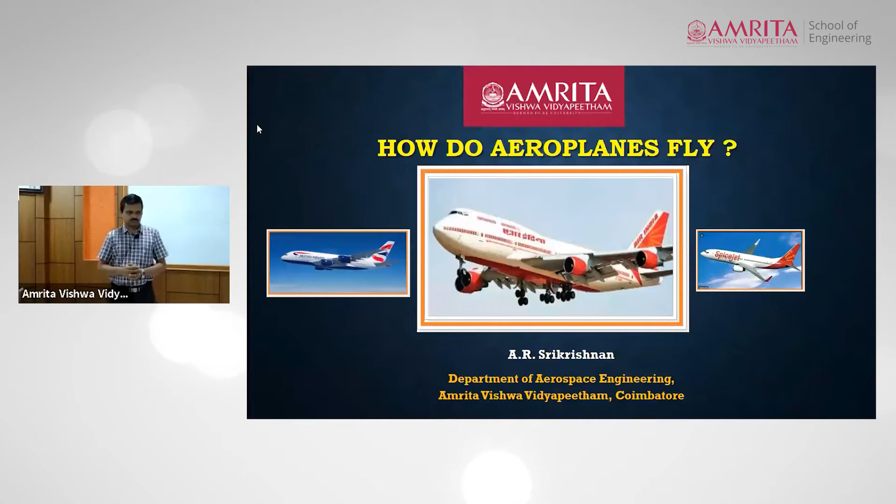Just to give you an overview of what we are going to discuss in the next maybe 20-25 minutes or so. We will first discuss what it takes to be able to fly. We know that we cannot fly. So we'll just address what it takes to be able to fly, and we will see briefly how aeroplanes manage to fly. So what does it require to fly and how do aeroplanes manage to fly?

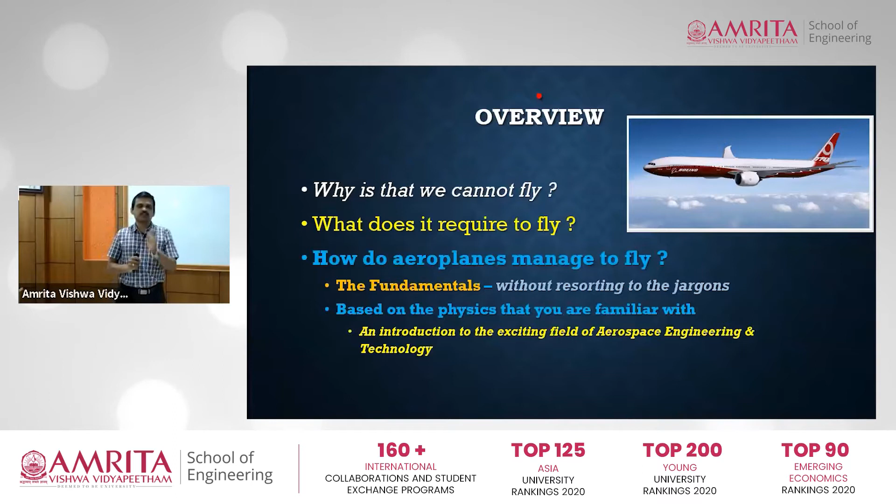We will just look at the fundamental aspects of how aeroplanes fly, without resorting to the jargon or theories which are used in this field, and we will try to rely only on the physics that you are familiar with, the laws of physics that you have studied, and the concepts that you already know. So that's the attempt in this particular session.

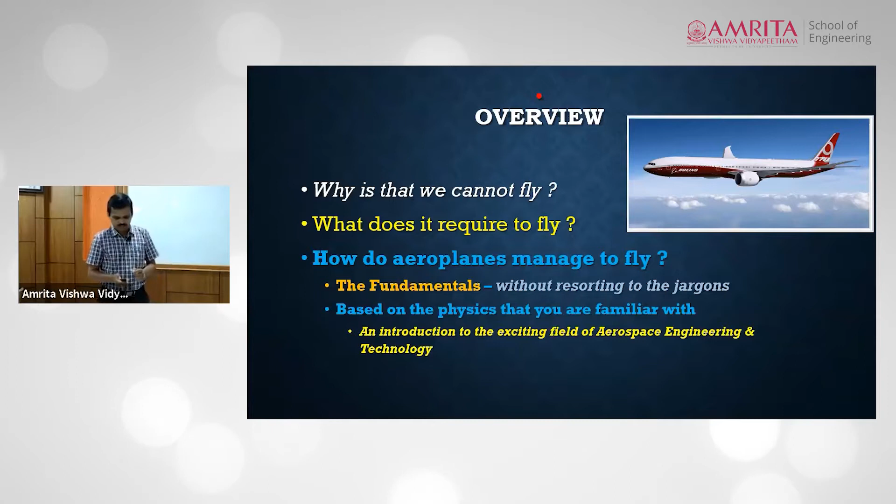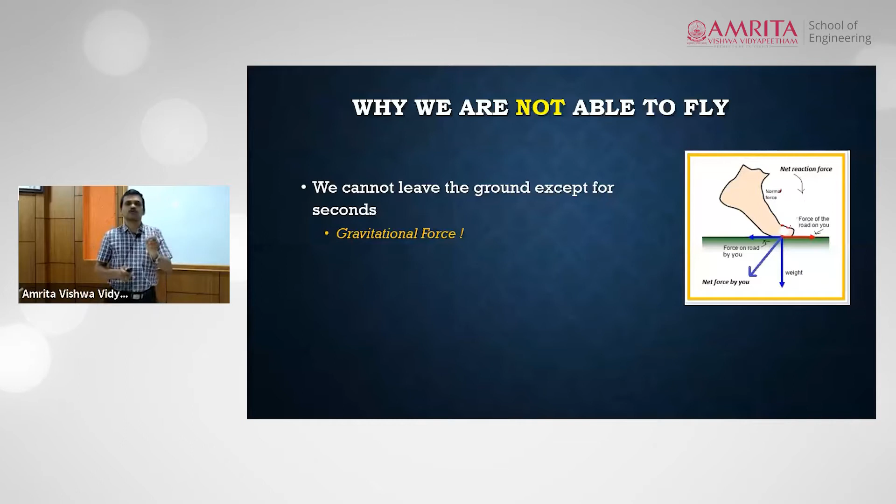Before we address the issue of how aeroplanes fly, let's pause for a while and think, why is it that we are not able to fly? We know that even if we want to fly, we are not able to. In fact, we cannot be in the air for more than a few seconds possibly. If you jump up, you will be pulled down, and we know why it happens, because the gravitational force always acts on us. So that's why we are not able to fly, but we know that we can walk.

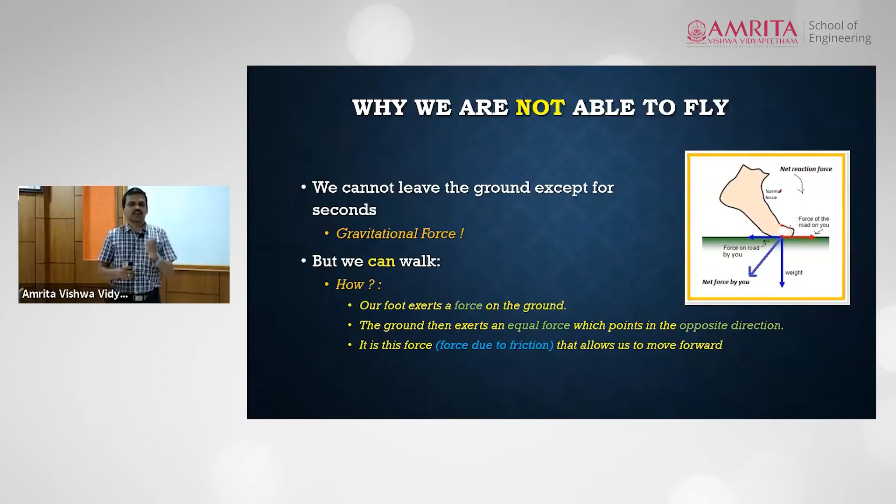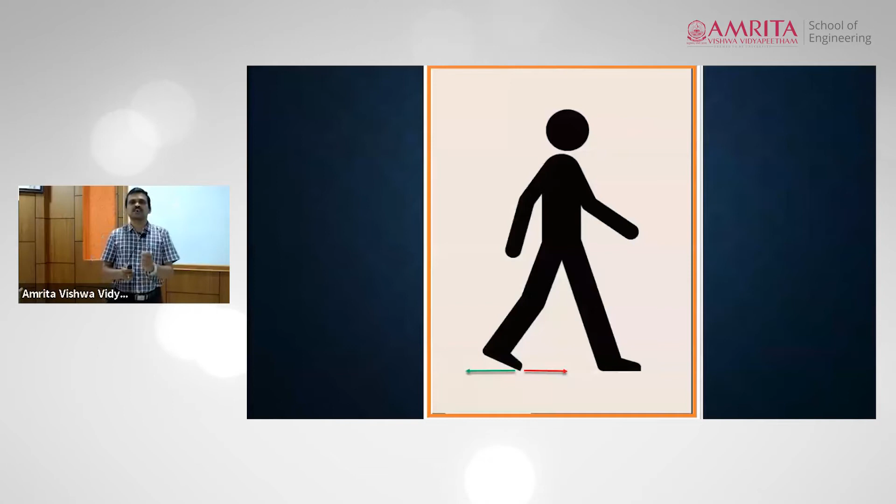How do we walk? We exert a force on the ground by our foot, and there is an opposite force created because of friction, which will be in the direction that we are trying to move. That force, created as a reaction because of friction, keeps us moving forward. So when we walk, there is a force that we apply on the ground, and there is a reaction created by friction which keeps us moving forward.

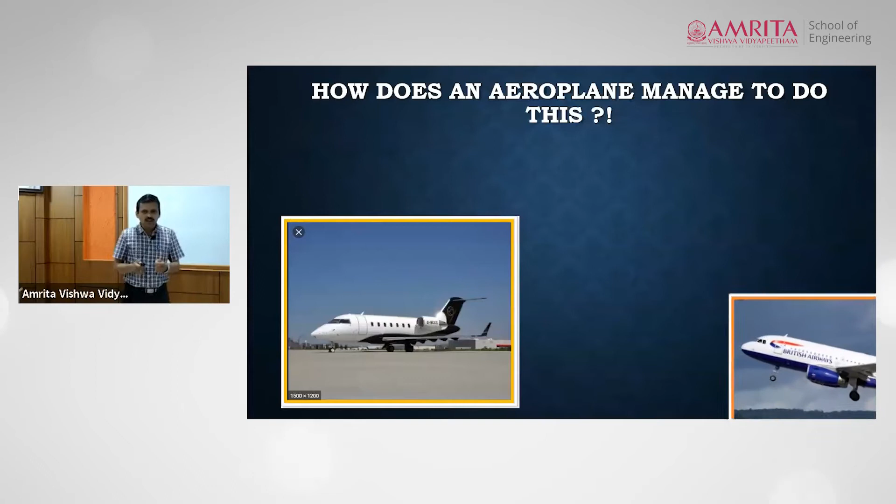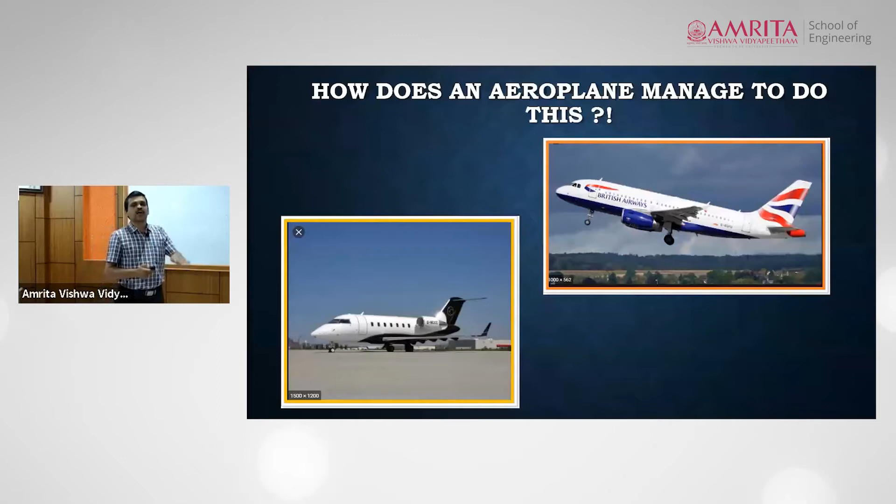When you consider an aeroplane, the image that you see there is an aeroplane which is parked in the airport. So it's grounded, it's standing on the ground. What we are trying to understand is what it takes for the aeroplane to go from being parked in the airport to being airborne, as it is in the next image. That is what it takes between these two stages: on ground versus in air.

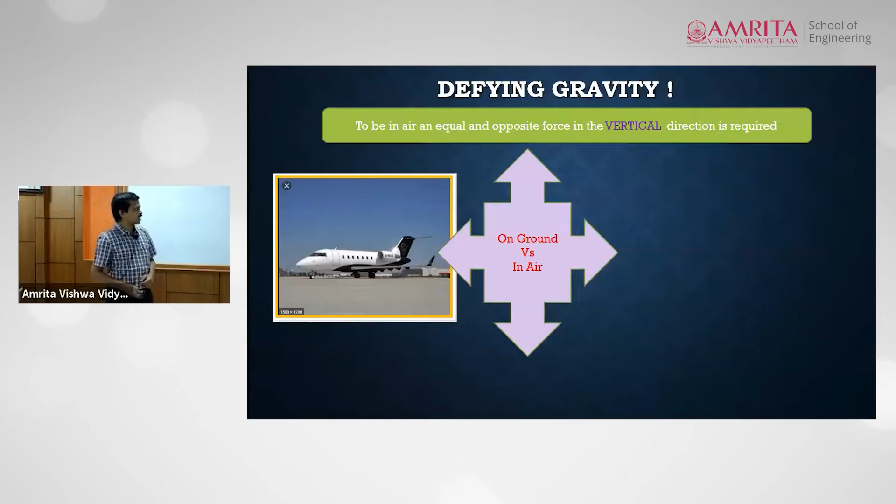When the aeroplane is parked in the airport, the force of gravity is acting on the aeroplane the same way as it is acting on us, as indicated by that red arrow, which keeps it down. Whereas when it is up in the air, please look at the second image, the force of gravity continues to act as indicated by the red arrow, but there is another force which is shown by that green arrow in the picture.

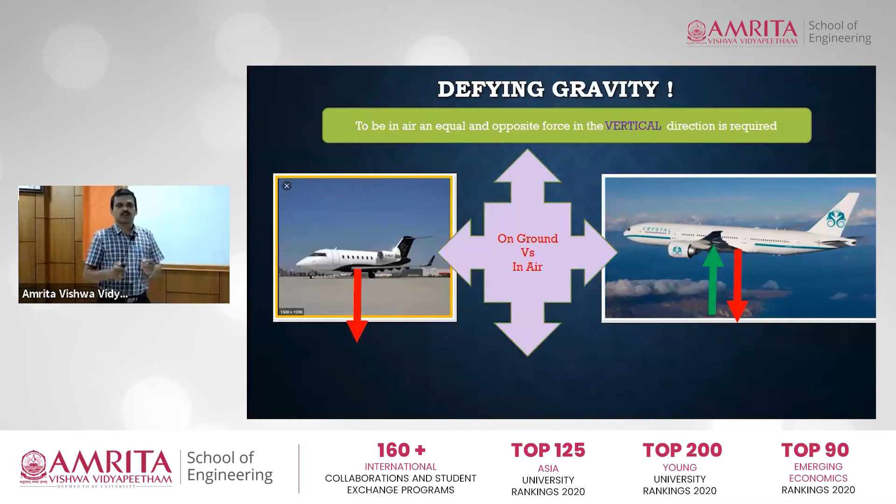There is another force which acts in a direction opposite to the force of gravity, and it's this second force which helps the aeroplane to be in the air. So what we are trying to understand is how this upward force is created. There is a force which lifts the aeroplane up. How is this force created? How does the aeroplane manage to get this force which lifts itself up into the air?

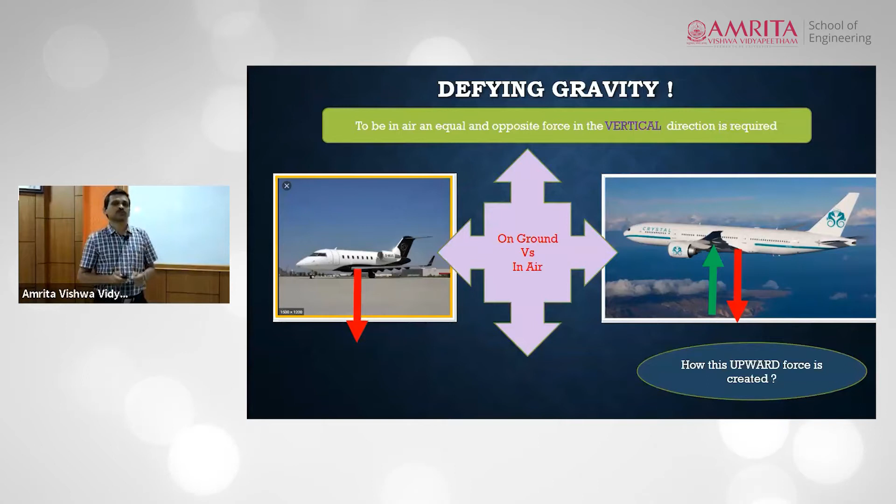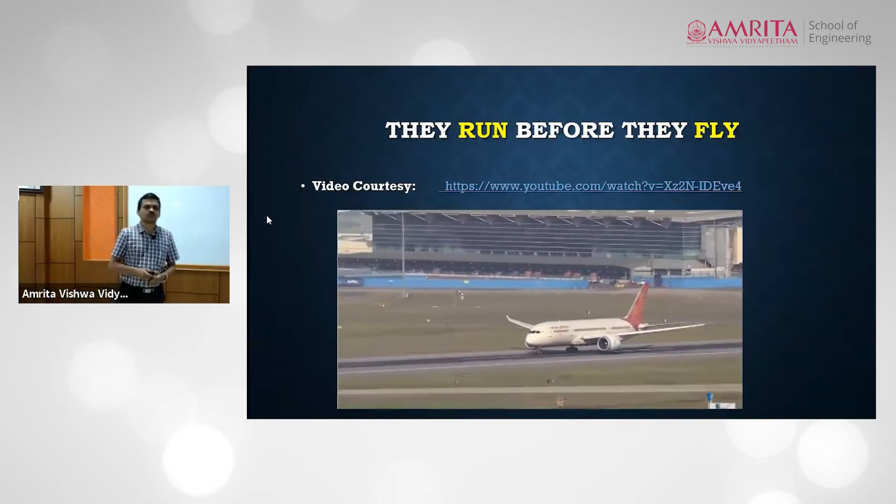Now, before we try to understand the physics of it, let's look at how aeroplanes actually get into the air. For that, we are looking at this video from YouTube, which shows us some takeoffs of aeroplanes. As we know, there is a phase called takeoff. That is where the aeroplanes run along the runway before they take off into the air.

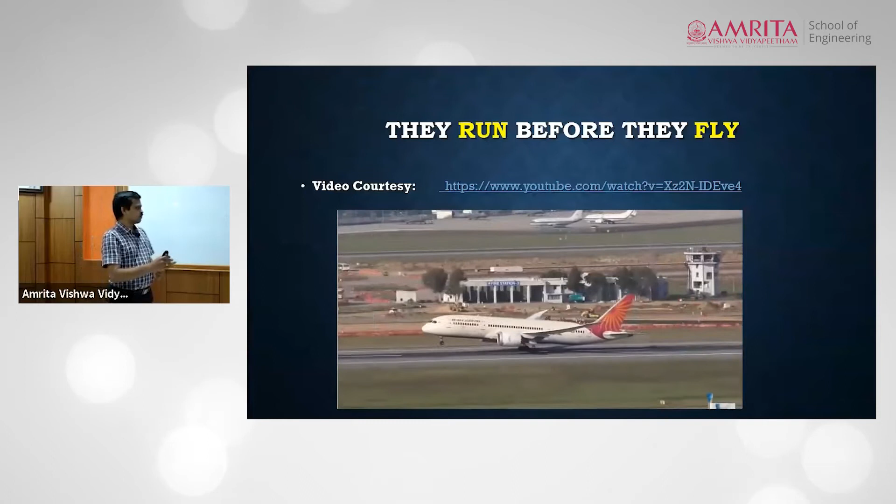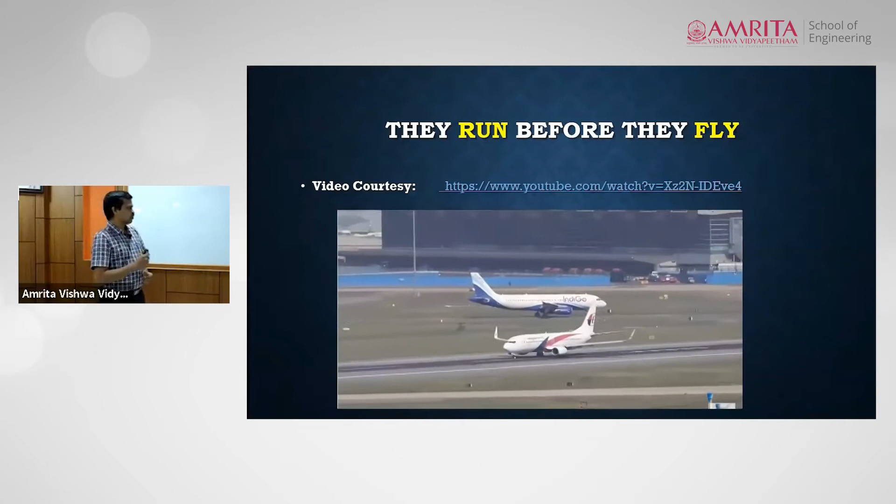So it's a long runway. After the initial run, the aeroplane gradually lifts itself up into the atmosphere. Let's look at another one. The same way, the runway is well paved and it's long enough for the aeroplane to come to a speed at which it can lift itself into the air. So after the initial phase of run, the aeroplane gradually rises up into the air. And typically, this is the way all the aeroplanes that we see in the airports take off.

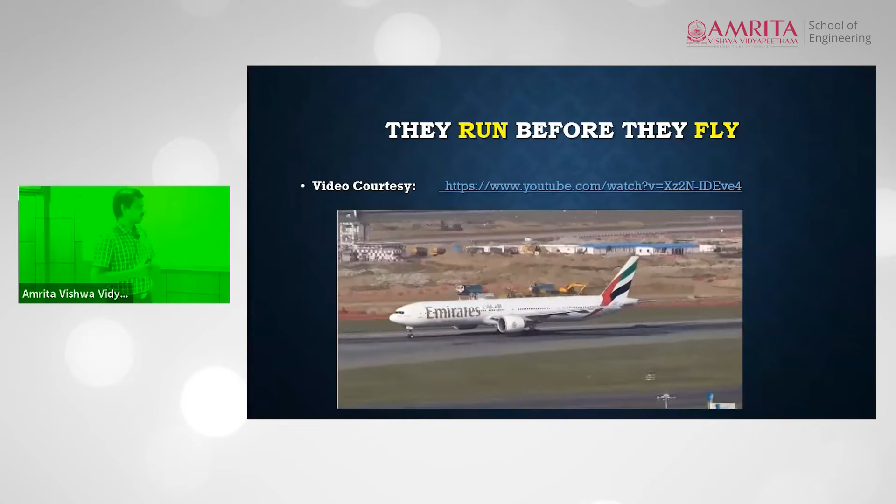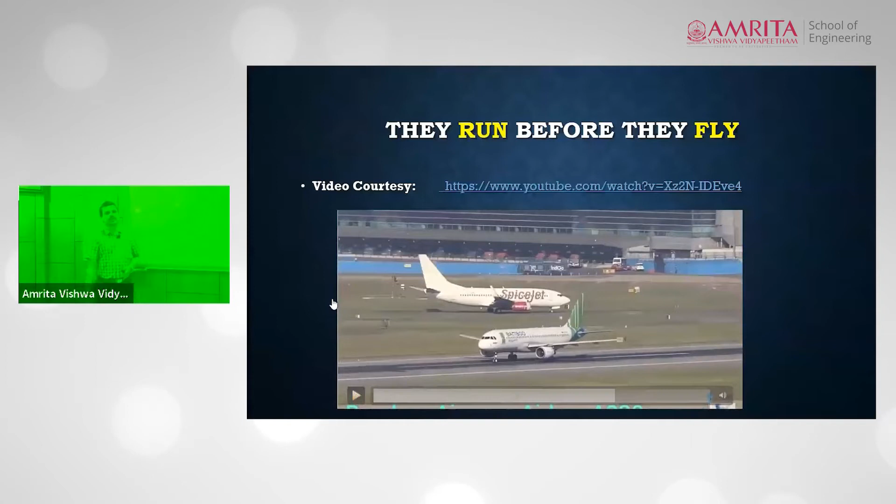Then let's look at another one. This is seemingly a bigger aeroplane. So I would expect that this will take a longer distance to lift itself into the atmosphere. It picks up speed as it runs through the runway, goes for a longer distance and gradually takes off into the air. So this is typically what the aeroplanes do. They run for some distance before they move into the atmosphere.

Now let's see what happens when the aeroplanes run. Before that, please pause for a while and think of what happens when you run. When we run on the ground, even if there is no wind blowing otherwise, we feel that air is flowing past us. That is, wind is blowing in a direction that is opposite to the direction of our running, right? So this is a usual experience.

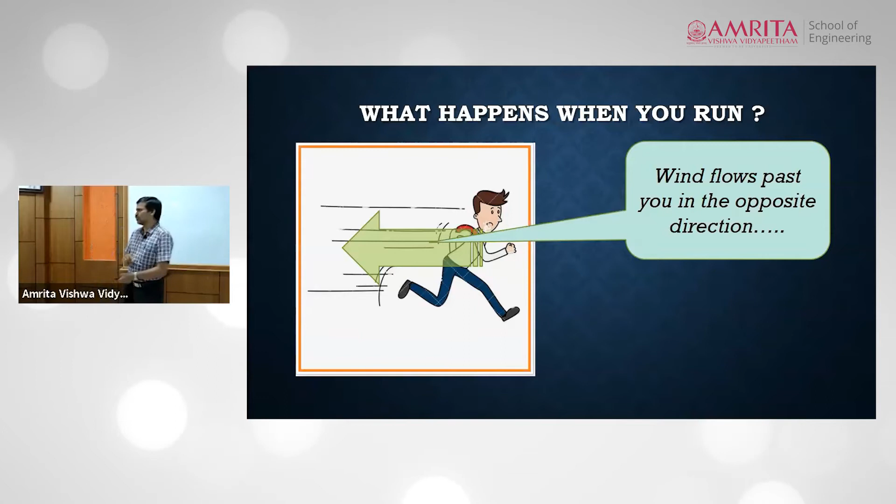The same thing happens when the aeroplane runs on the runway as well. When the aeroplane runs, wind flows past the aeroplane. So if you consider the aeroplane to be stationary, what the aeroplane would feel is that the wind is flowing past its body. What happens when such a flow of air takes place over the body of the aircraft? Let's try to understand that.

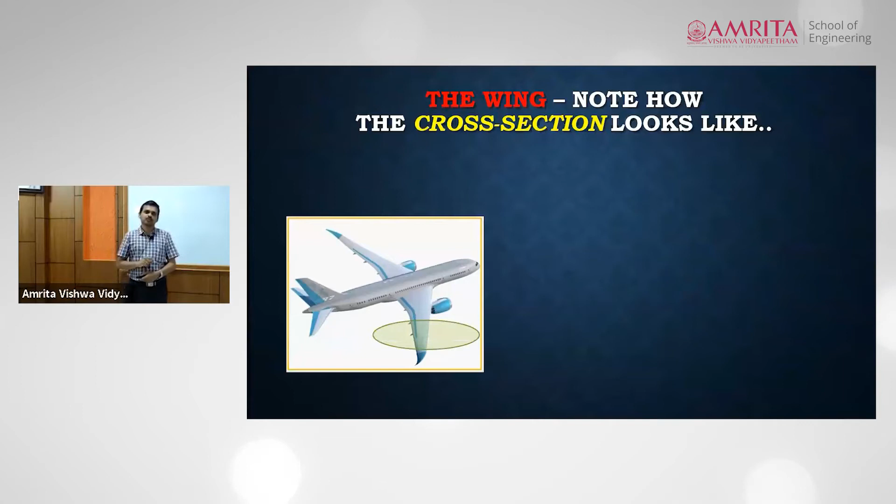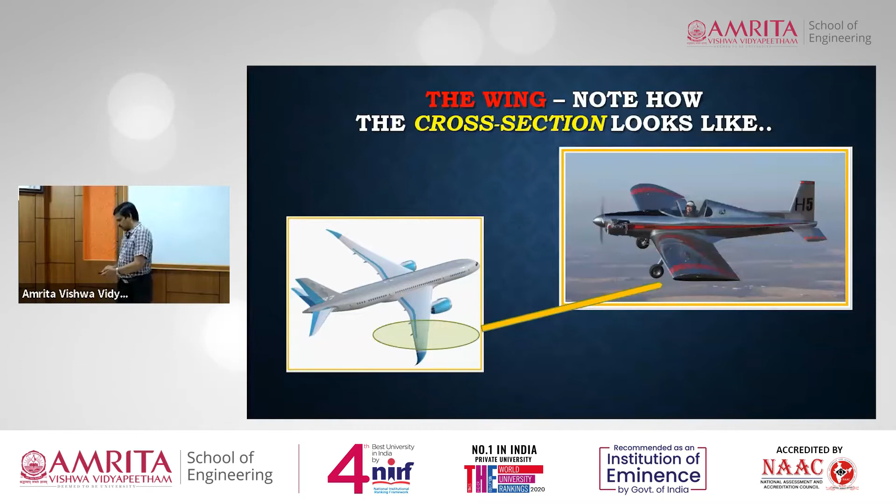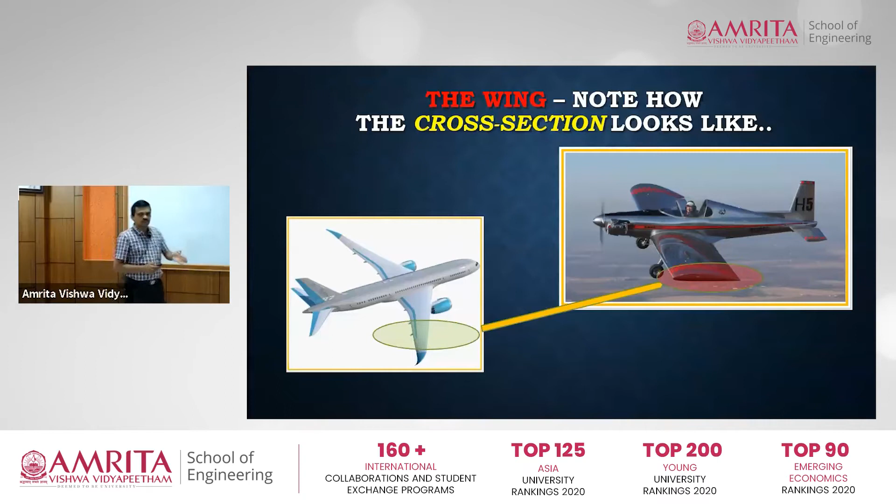We are looking at the component that is called wing. I just encircled the portion of interest. If you were to cut across that particular section, you will see that shape again in the second image, encircled in red. It shows the section of the wing. I repeat, when the aircraft is moving, it experiences flow of air across that particular section which is highlighted in the two pictures.

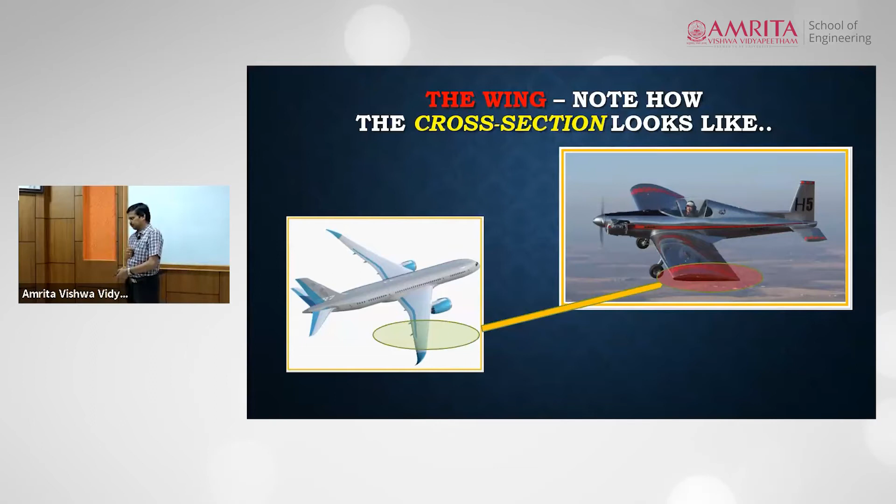This flow happens all over the aeroplane. Particularly, we are focusing on the flow over the wing, because it's the wing which helps the aeroplane lift itself into the atmosphere. Now just look at that particular cross section. We'll try to focus on it with another picture. I just zoomed that in to a different picture here.

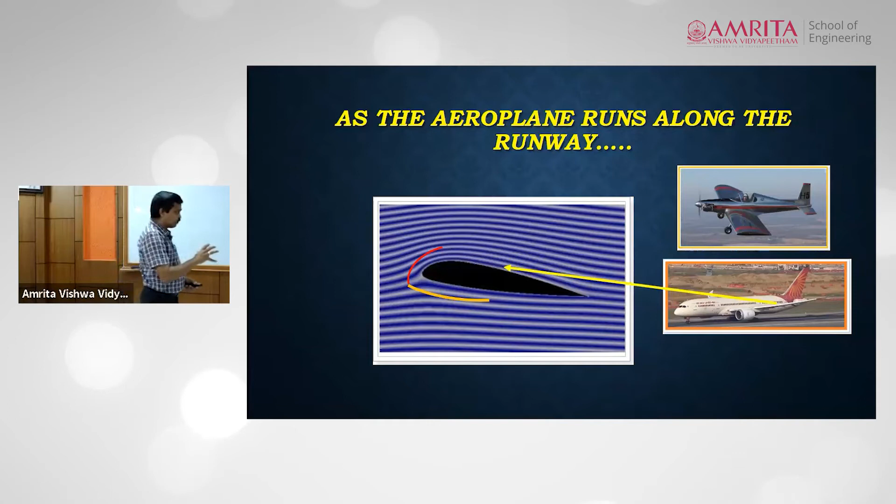The attempt in this picture is to depict the flow of air by those bluish and white lines. You can consider them as fluid particles, the flow of air taking place across the section of the wing. I've shown that yellow arrow to indicate that we are cutting across that section and looking at what happens when the aircraft is running. When the aircraft is running, there is a flow of air across the section of the wing that we are seeing in the picture.

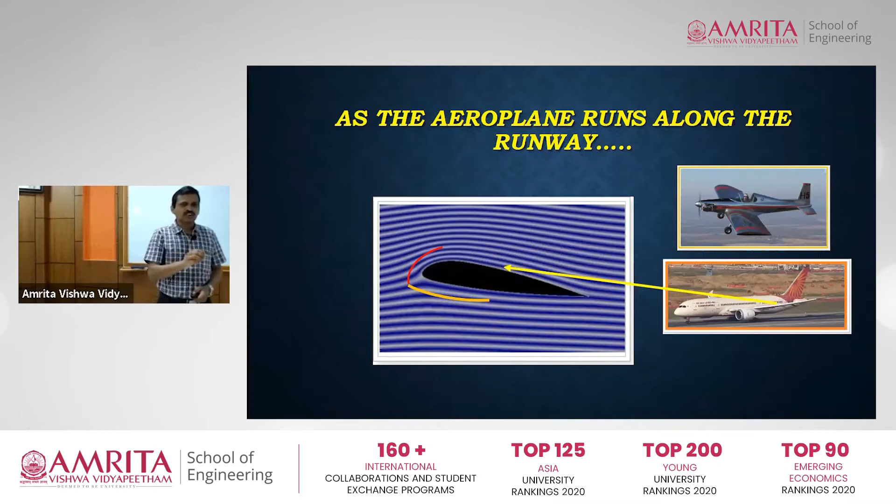Now, what happens when air flows across that kind of a solid surface? The peculiar geometry in that picture ensures that when the air is flowing over it, the air is somewhat deflected downward. The wings are created with this kind of section in such a way that when there is a flow of air across that section, the air gets deflected downward.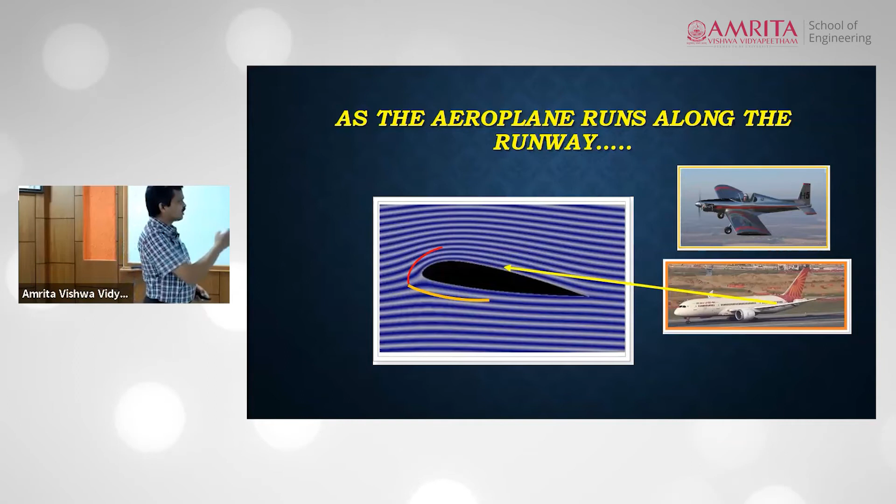You can actually notice the downward deflection in the picture: all the lines that you see there are turning down towards the trailing edge of that particular section. This is what we mean by the flow getting deflected downward.

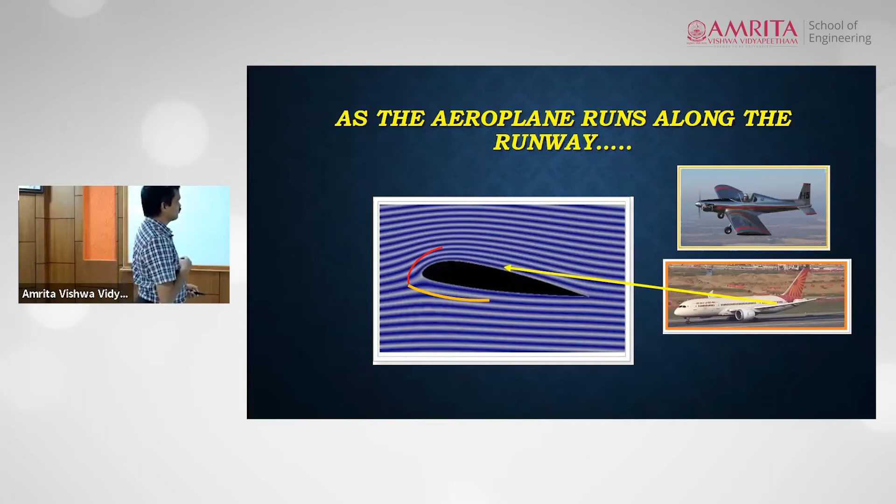Now, so what? What happens if the flow is getting deflected downward? This, what we are calling this deflection, is actually a turning of the flow. Now, a few things happen because of turning of this flow. What really happens is the wing, because of its peculiar geometry, is exerting a kind of pressure in such a way that the flow is getting deflected. So, in effect, this is like a downward force that is being exerted by the wing.

So, when the wing is exerting a downward force on the air, there will be an equal and opposite force, as we know by the third law of Newton. There will be an equal and opposite force acting on the wing, acting on the bottom surface of the wing, which will be vertically upward. So, this is one consequence of turning of the flow.

In fact, the turning of the flow, though it looks quite simple in the picture, entails some of the complex aspects of fluid flow. But then the result of these complex phenomena is there is an upward force, and the pressure distribution. If you consider the pressure, you are familiar with atmospheric pressure, fluid pressure, etc. So, if you consider the pressure that is exerted by air all around the wing,

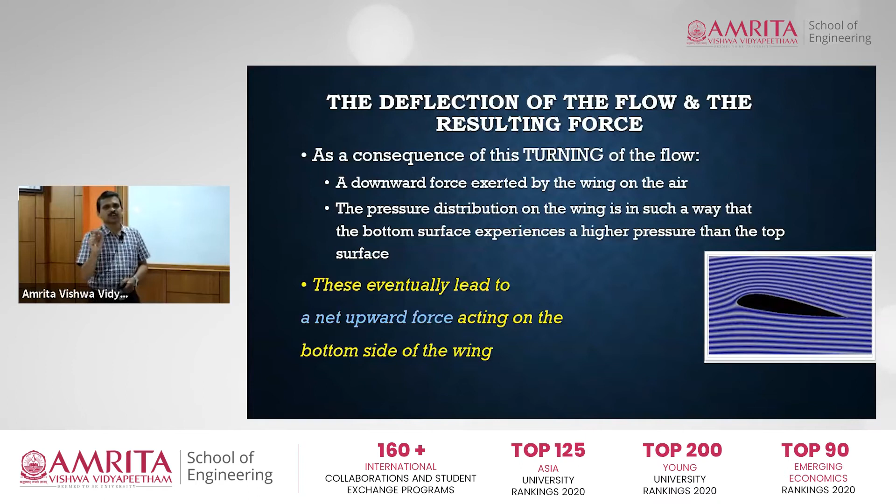the distribution of pressure is in such a way that the pressure exerted by air on the bottom surface of the wing is higher than the pressure that is exerted on the top surface. Why this? This is because of the entire flow configuration, that is the deflection that we just mentioned. So, because of the deflection, the pressure distribution is in such a way that there is an upward force which is higher than the downward force acting along the surface of the wing.

So now let's consolidate what we just discussed. There is an action and reaction. There is a pressure disturbance. There is a pressure distribution in such a way that there is a resulting upward force which is higher than the force that is acting downward, which means that there is a net force acting on the wing in the upward direction.

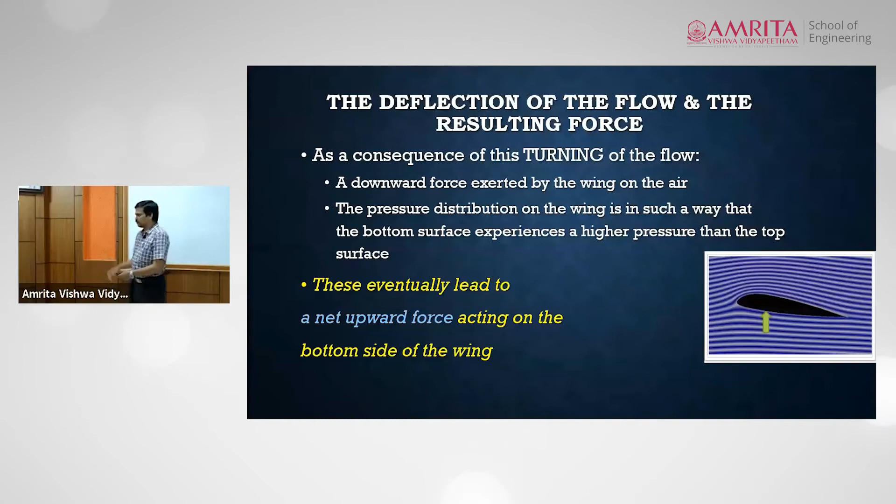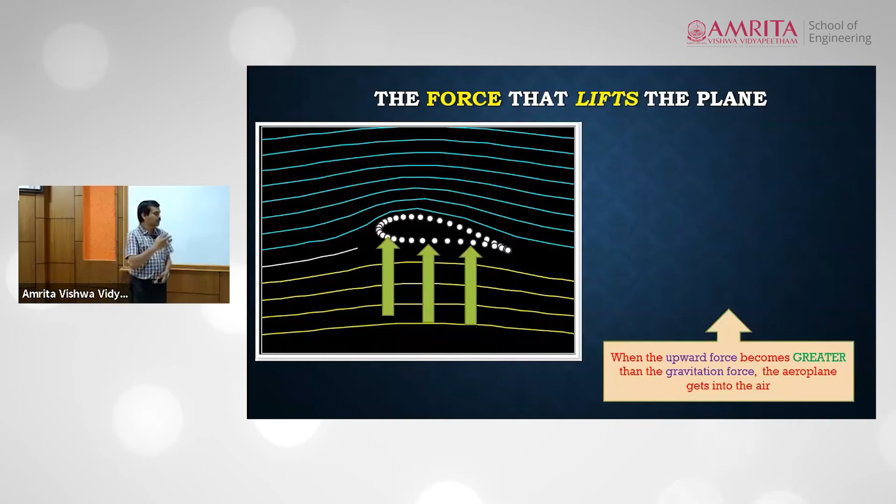So the whole thing happens because of deflection of the flow. The flow is getting deflected because of the geometry of the wing. Because of the deflection, there is a net upward force which is created, which is acting all over the wing. So that's the upward force that we have been discussing. Now, just repeated with a different picture here, again zooming in on the shape that we are talking about, that is the section of that particular wing.

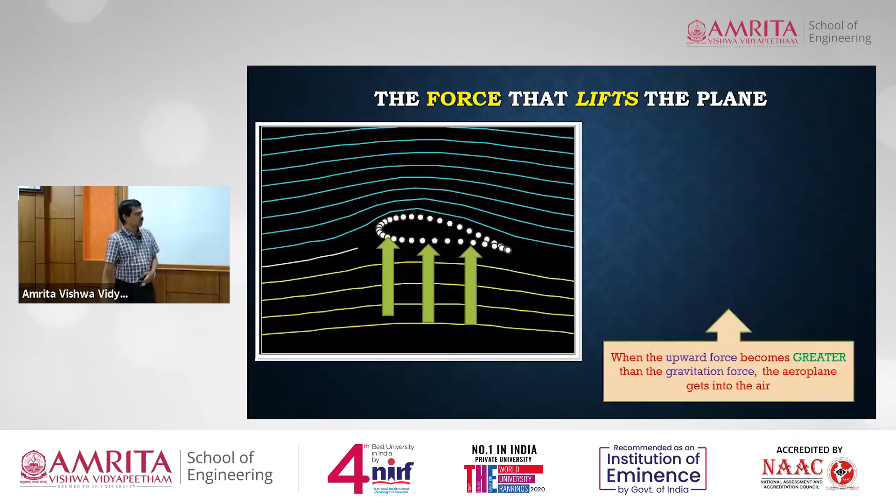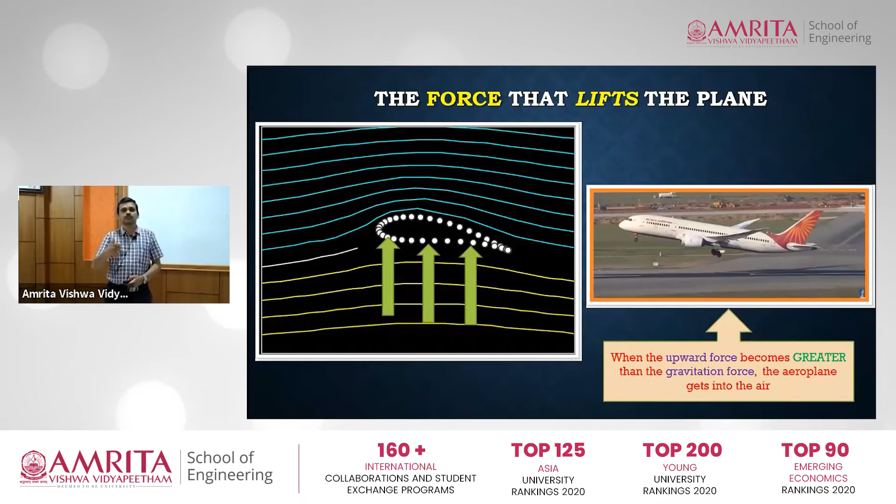So there is a net resultant force acting on the wing, and when that force is large enough to beat gravitational force, the aeroplane will lift itself into the air. Just think of it. There is gravity; because of the gravitational pull, there is a downward force acting on the aeroplane, which is because of its weight.

Now, when it runs, there is a flow of air across the section, and the section of the wing is such that the flow is deflected downward, and the deflection causes an upward force. So now you have two forces, the gravitational force acting downward, and the upward force created by this flow deflection. When the upward force is higher than the gravitational force, naturally the aeroplane will be lifted up into the atmosphere. So this is exactly what happens when the aeroplane is running on the runway and eventually taking off.

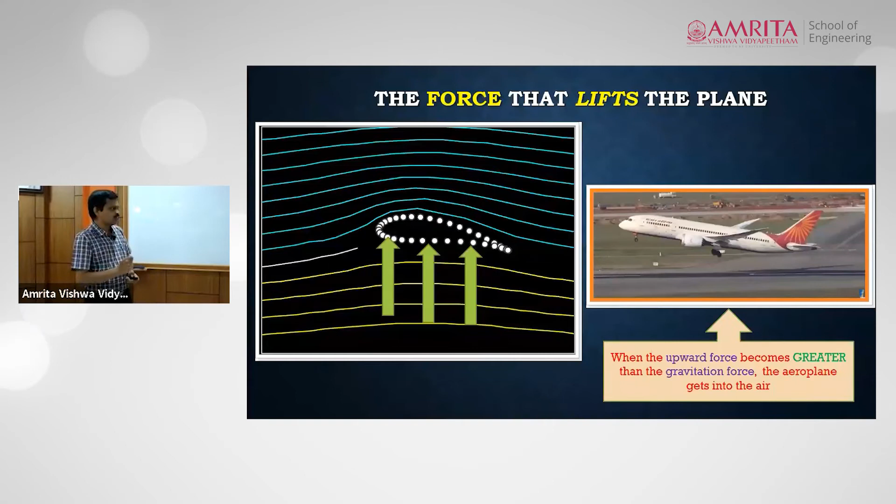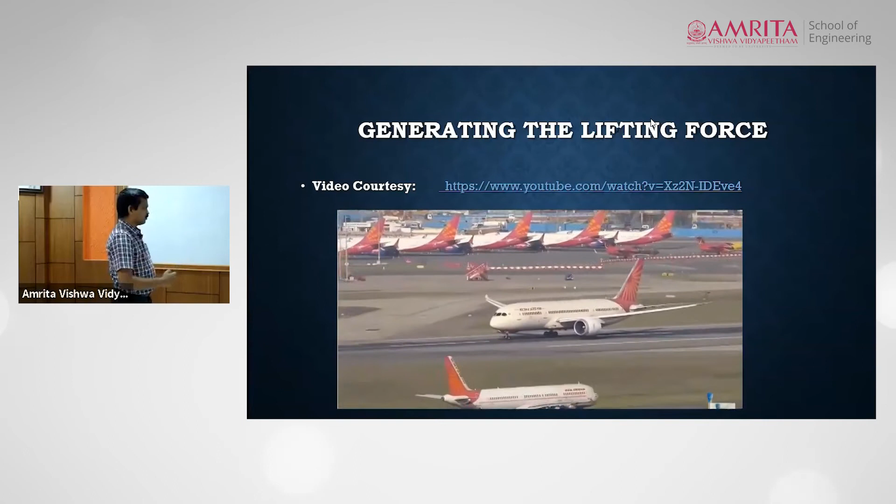So now, with this concept in mind, let's once again look at the takeoff. The same video, we'll just see one takeoff. So the aeroplane is running along the runway, air is flowing past its wing, the deflection is happening, though we cannot see it.

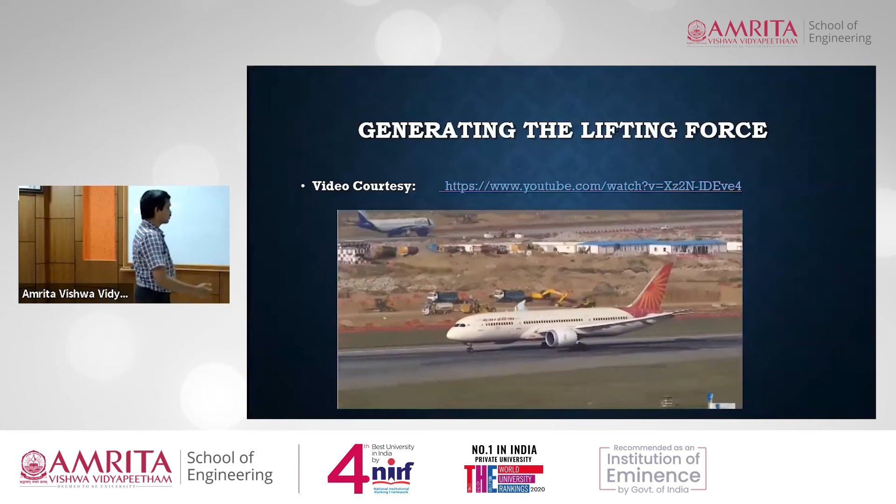The deflection is happening, and because of that there is an upward force. As the velocity increases, the upward force also increases and keeps increasing. When it equals gravity, and when it exceeds gravity, the upward force wins the race and pushes the aeroplane up.

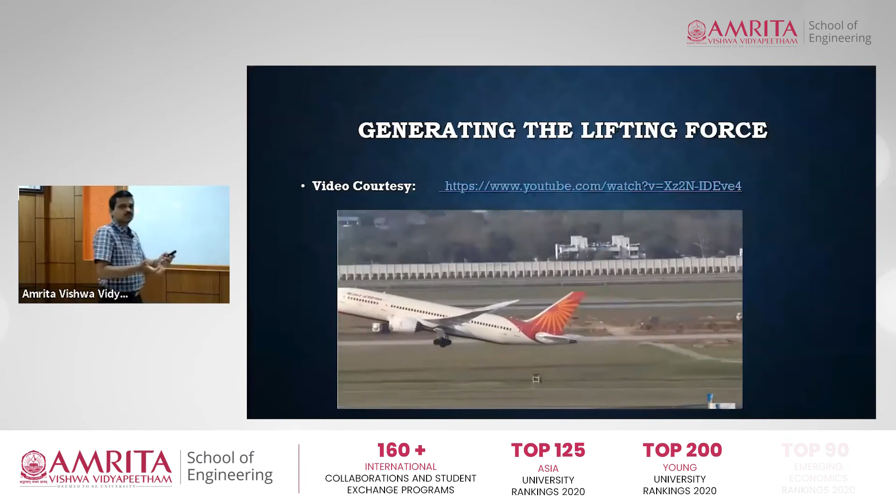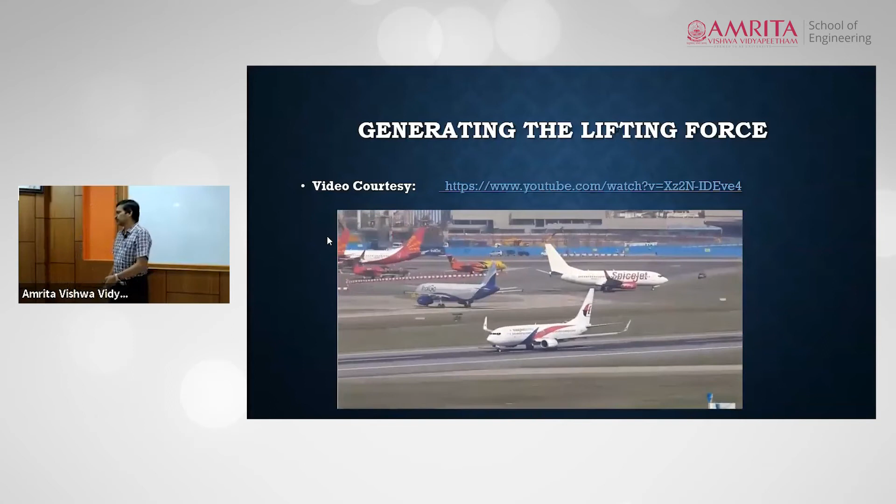So when the aeroplane is up in the air, gravity is still acting on it, but now the upward force is higher than gravity. That is when it is taking off into the air. Actually, when it's flying level, the two forces are equal, because gravity is acting downward and the upward force is acting up. So that's how the aeroplane gets into the atmosphere — when the lifting force is higher than gravity, the aeroplane gets into the atmosphere.

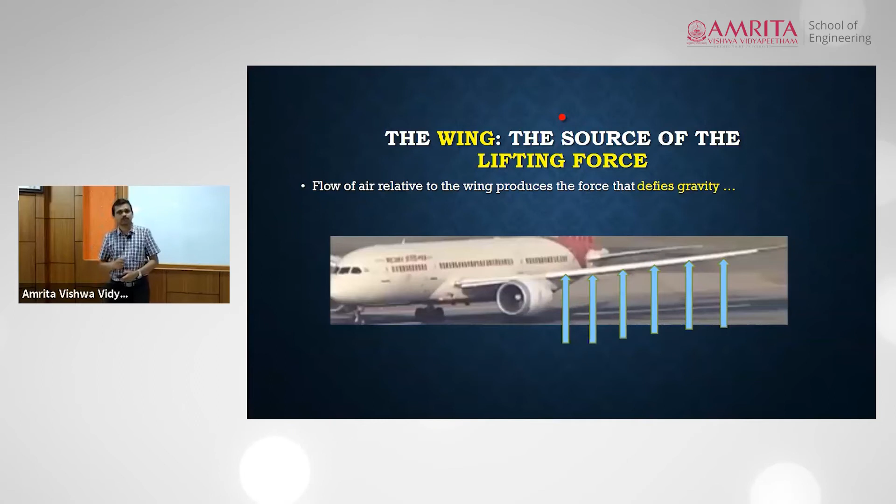Okay, now let's pause for a second. So what we are saying is that when the aeroplane runs across the runway, there is a force created which lifts it up into the atmosphere. That is the upward force we are talking about. So keep in mind that unless the aeroplane is running, there is no upward force.

So for the aeroplane to be up in the air, it needs to be moving forward. The aeroplane cannot stand still in the atmosphere — if it stands still, it doesn't get the lifting force. So it has to keep on moving. Basically, if there is no velocity, there is no upward force. Please keep that in mind: unless the aeroplane is moving, it cannot keep itself up in the air.

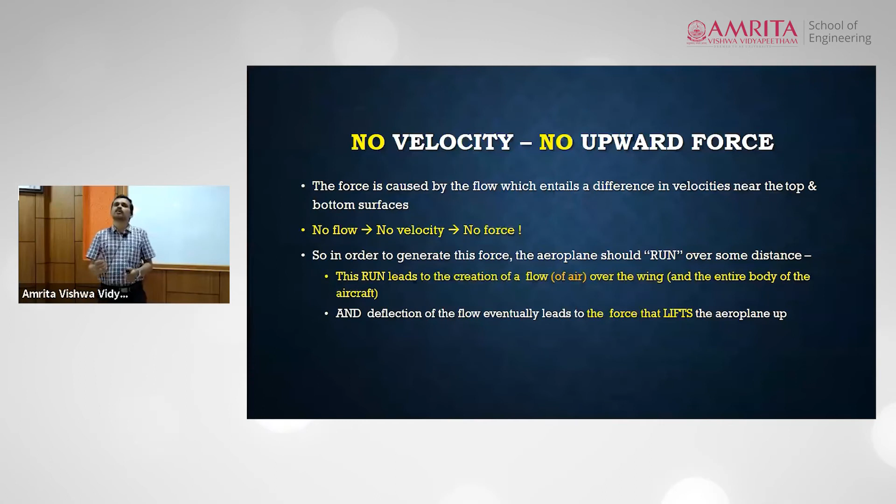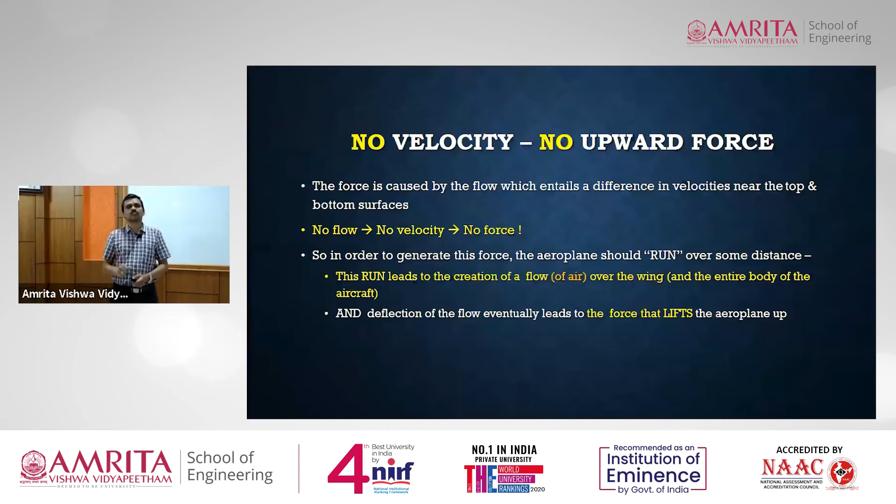Because gravity is always acting on it, if it has to defy gravity, it has to be moving forward, which will help it create the lifting force. Okay, now let's move forward.

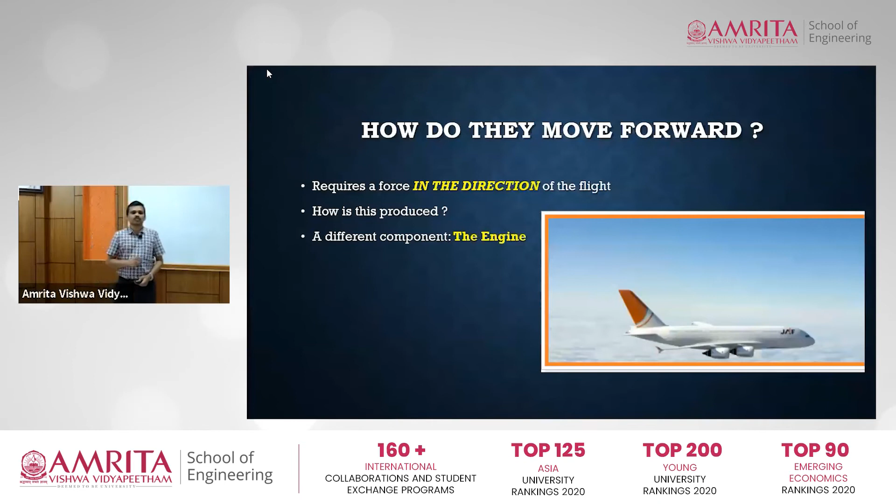So then the next question is, how does the aeroplane move forward? I just mentioned the fight between the lifting force and gravity, which acts vertically — the lifting force is vertically up, gravity is acting vertically down. Now the question is, how does the aeroplane move forward, that is, in the horizontal direction?

To begin with, when it's running on the runway, how is it able to move forward? The forward movement is required to create the lifting force, and for it to be flying at high velocity, it needs some force acting in the direction of motion — look at that red arrow indicating that. This is showing a horizontal flight. If the plane is going horizontally forward, there should be some force pushing it in the horizontal direction.

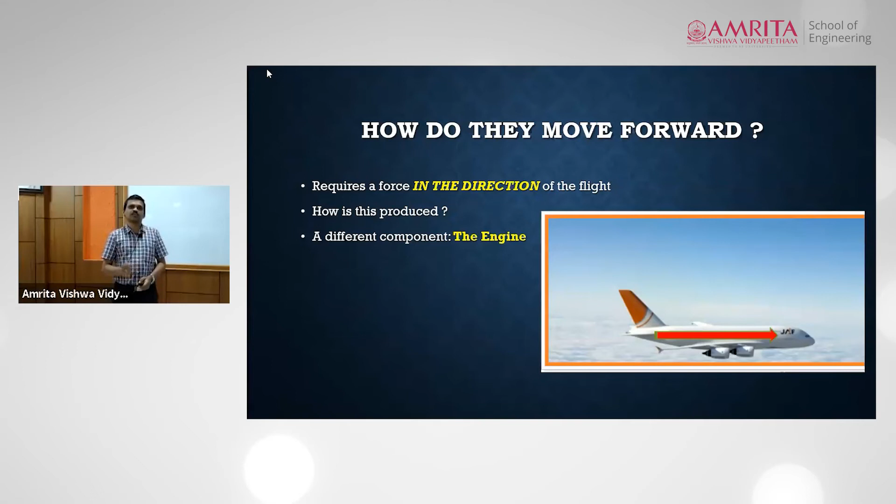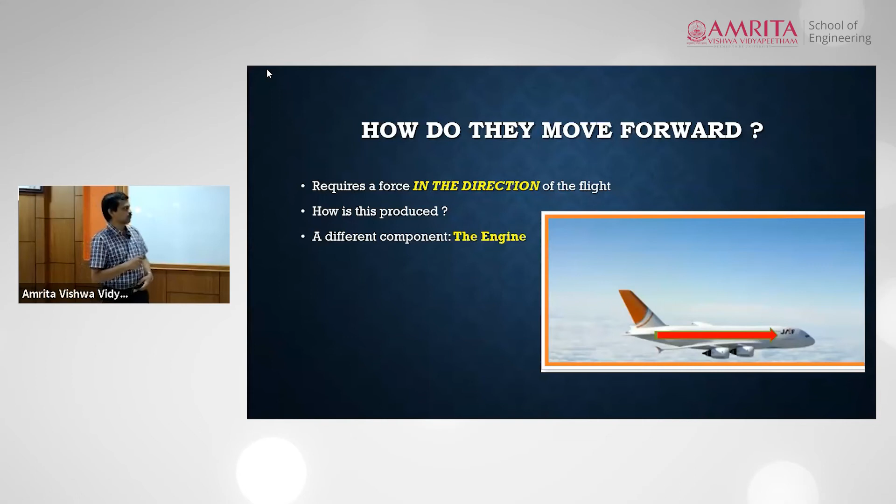The force we talked about so far acts vertically up. We need another force which should be pushing it forward in the horizontal direction. How does the aeroplane create that force? This force is created by another component called the engine of the aeroplane. So far we spoke about the wing — now we are focusing on the engine, the part highlighted in that picture. That is called the engine.

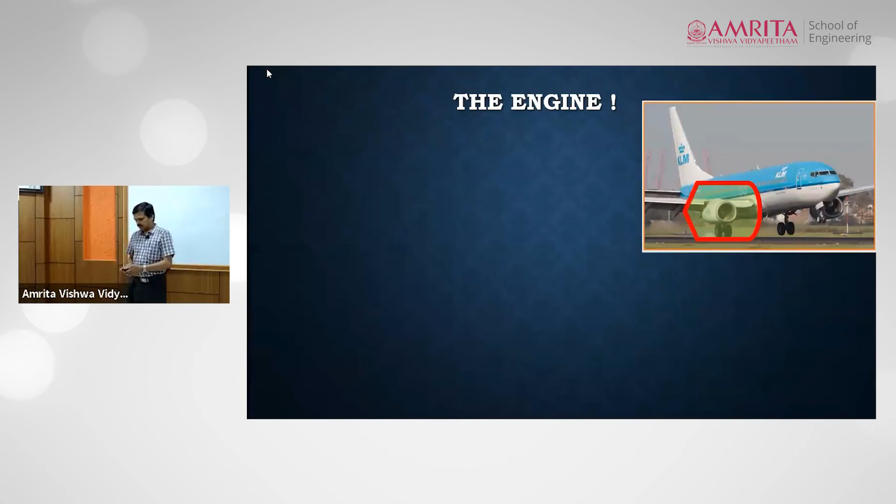Actually, it's much smaller than the wing. The wing is a quite lengthy, huge component. As opposed to that, the engine of the aircraft is typically very small in relation to the size of the wing.

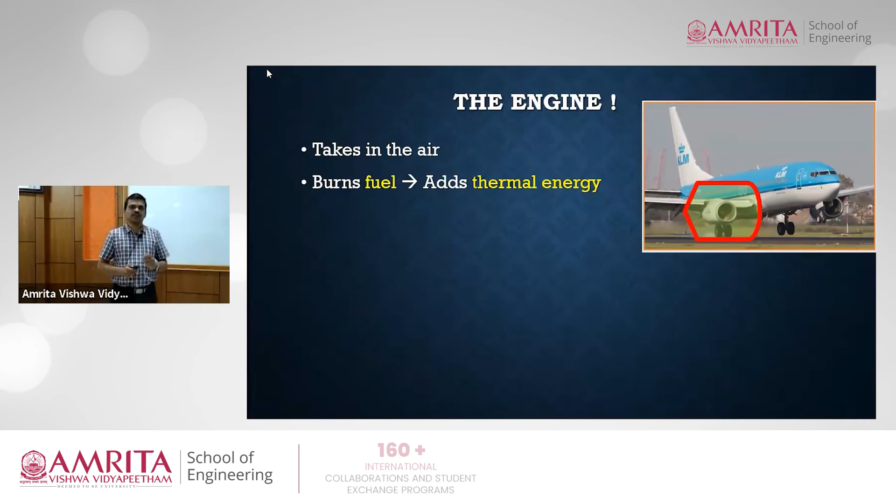Okay, now what does the engine do? First, it takes in air from the atmosphere and it burns fuel. Now, burning fuel in air is nothing new — when you see a bike, a car, a bus, a train running, all of them have fuel, right? We know they all use petrol, diesel, etc. All of them make use of fuel.

What do they do with the fuel? They burn the fuel in the engine. The energy in the fuel, which is chemical energy, due to the burning process, gets converted to thermal energy.

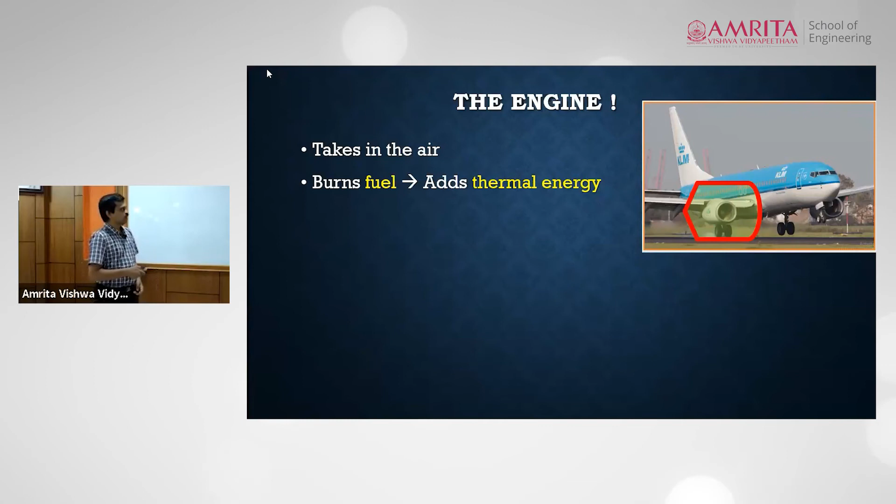The same way, an aeroplane also burns fuel and converts the chemical energy to thermal energy within the engine. That happens within this component that we are talking about as the engine. Now, after the energy is converted to thermal energy, the engine or the remaining parts convert that thermal energy into another form of energy which you are also familiar with, kinetic energy. Kinetic energy, as you know, is related to velocity, right?

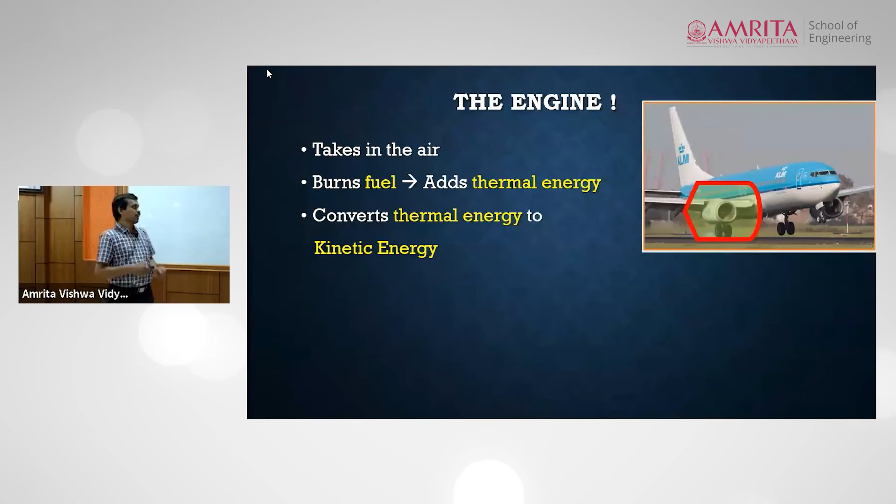So the engine components are designed in such a way that this thermal energy can be converted eventually to kinetic energy, which means that air comes in with some velocity and the velocity is accelerated. That is, when you say thermal energy is converted to kinetic energy, it means there is energy added to the air, so that air is coming in with some velocity, leaving the engine with a higher velocity.

I repeat that, air is coming into the engine with some velocity, and because of the processes within the engine, air leaves the engine with a higher velocity. So that additional energy for that kinetic energy is coming from the fuel.

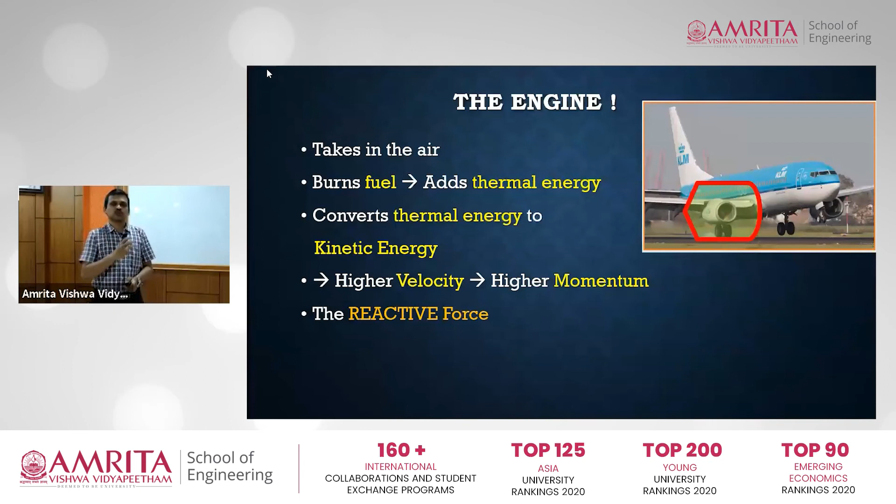So what happens when it leaves with a higher velocity? Higher velocity, we know, is associated with higher momentum, mass into velocity. Mass is almost constant here, so we will assume mass to be constant. So when velocity is high, you have a higher momentum. So air is coming in and going out with a higher momentum. So there is a change of momentum.

Now recall Newton's second law. There is a change of momentum, so there is a force which is equal to the rate of change of momentum, right? So the aeroplane, the engine, is exerting a force on the stream of air that is going through it.

As a result of it, again the third law applies here. There is an equal and opposite force acting on the engine, which is acting in the direction of flight. This force gets transmitted to the engine and that keeps it moving forward.

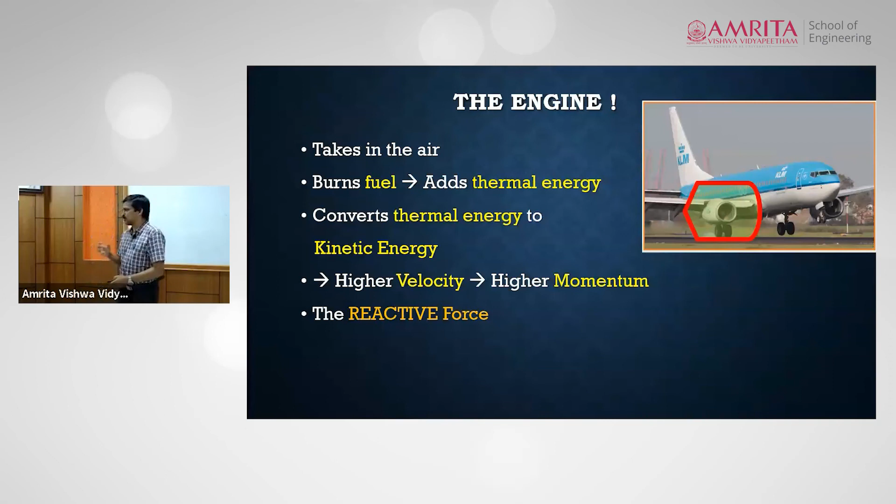So to summarize it, air comes in, fuel adds energy to it, air goes out with a higher velocity. Because of the increase in momentum, there will be a reactive force which is in the direction of flight. So as a result of all this, you are now creating a force which is in the direction of motion, and that keeps the aeroplane moving forward.

So now we have discussed both aspects: how the aeroplane gets into the air and how it moves forward. Just to summarize the whole thing.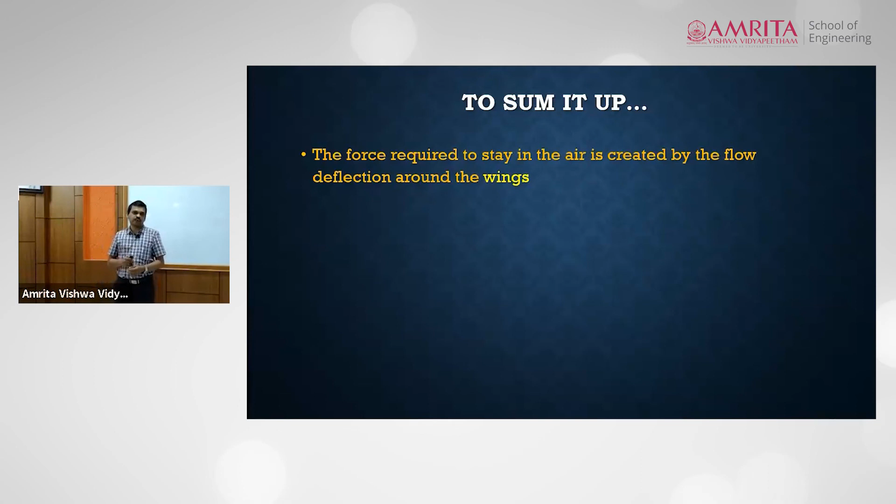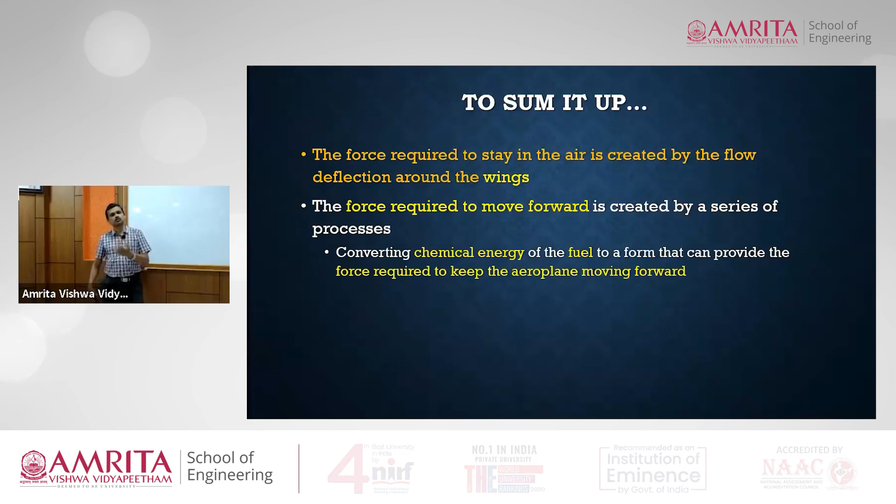The force that is required to stay in the air is created by the flow, actually the deflection of air by the wings, and this is caused by the running of the aeroplane along the runway. As a result of this lifting force, the aeroplane is able to keep itself up in the air. Now the force required to move forward, even during the runway, is created by conversion of chemical energy in the fuel, eventually to kinetic energy.

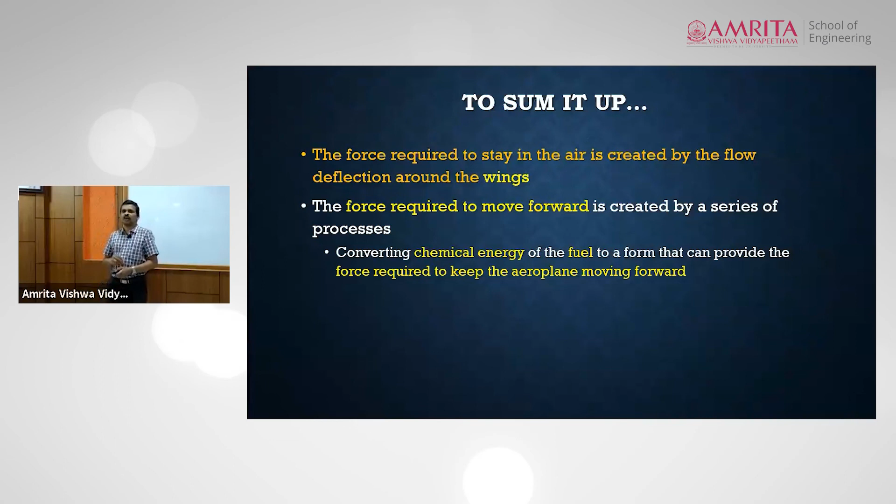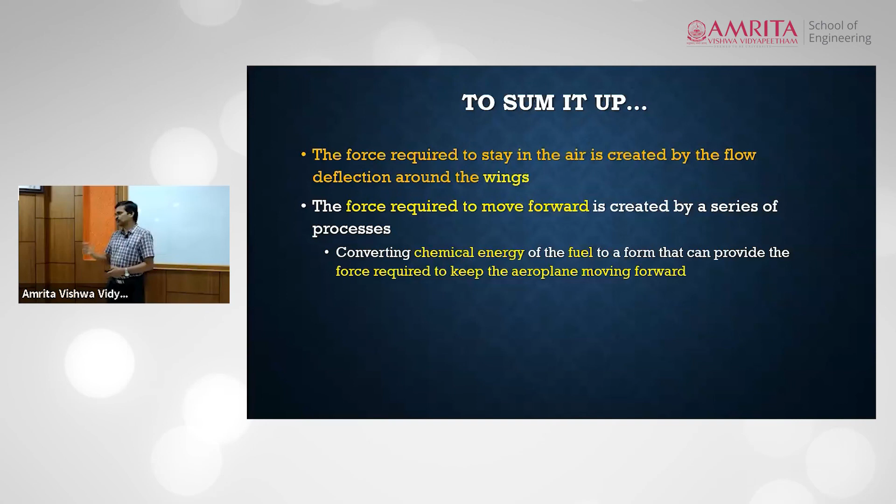And due to the exchange of momentum, there is a force which is created, and the force is applied in a direction that is along the direction of flight. So this force keeps it moving forward.

This is, in summary, the two forces that keep the aeroplane up in the air and moving forward.

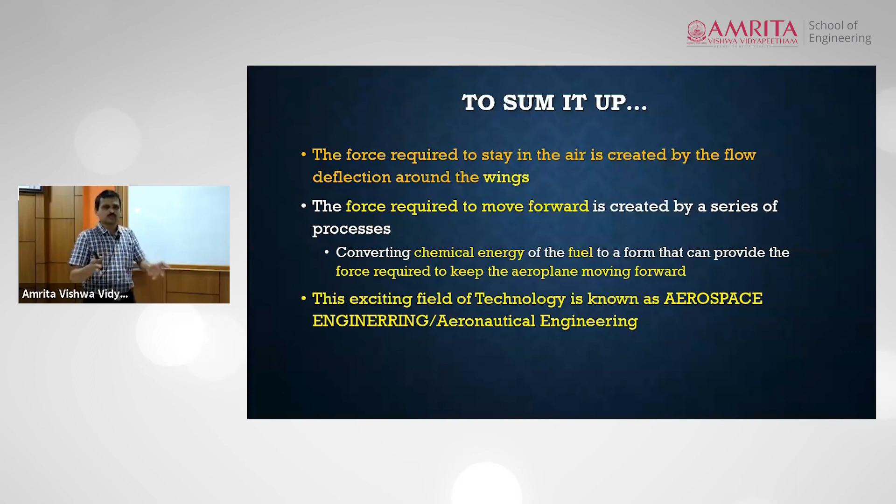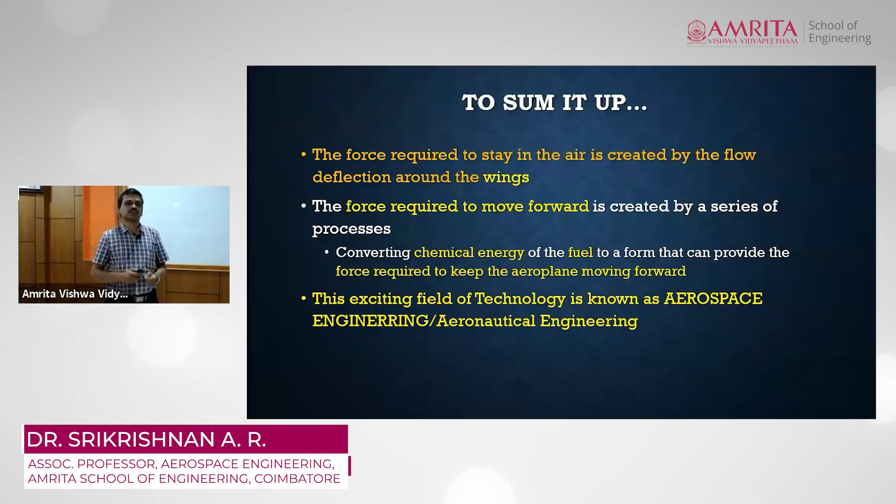So we have just looked at how these forces are created from a very fundamental perspective, a very fundamental frame of theory that is familiar to you, the concepts and physical laws which you have all studied. This entire field that deals with the design, development, manufacturing, control, etc., of activities related to aeroplanes is referred to as the field of aerospace engineering or aeronautical engineering, a very exciting field in which a lot of path-breaking research is going on worldwide, and much of that is going on in India as well. So with that, I wind up.